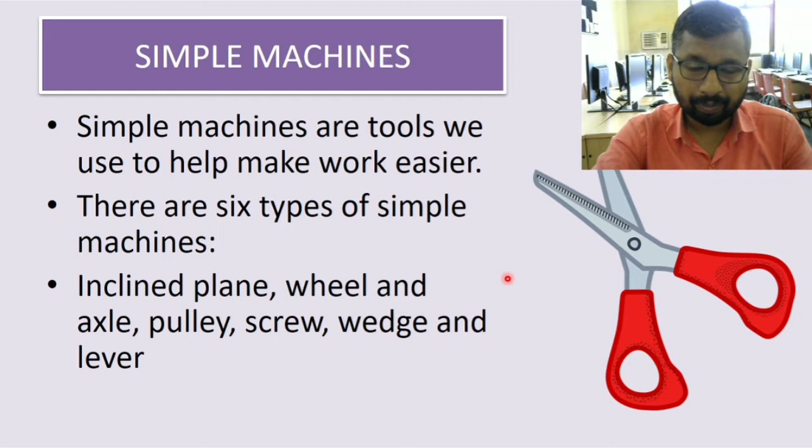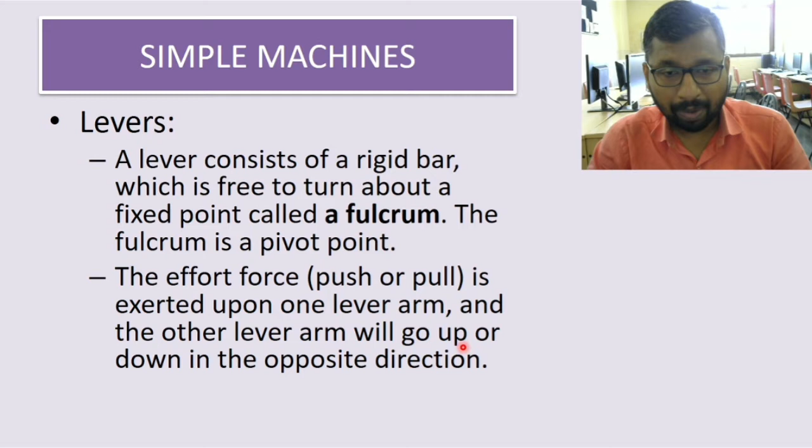A lever consists of a rigid bar which is free to turn about a fixed point called the fulcrum, which is a pivot point. The effort, that is push or pull, is exerted upon one lever arm and the other lever arm will go up or down in the opposite direction. Just like a seesaw - everyone has played in the garden - there is one fixed point in the middle which we call the fulcrum, and on either side kids play with each other, applying force so the opposite arm moves upwards or downwards.

Now the idea of lever is based on three things: first is effort or force, then there is distance, and then there is a balance. The downward force that a man applies to one end is called the effort. The lever's balancing point is called the fulcrum - this is the part of the machine that does not move.

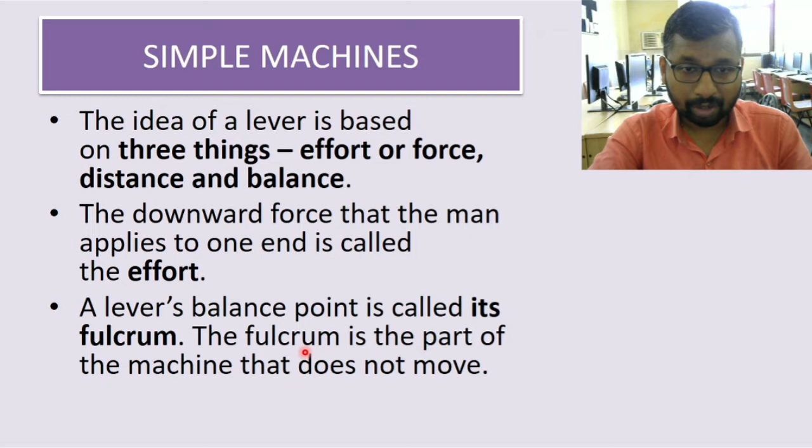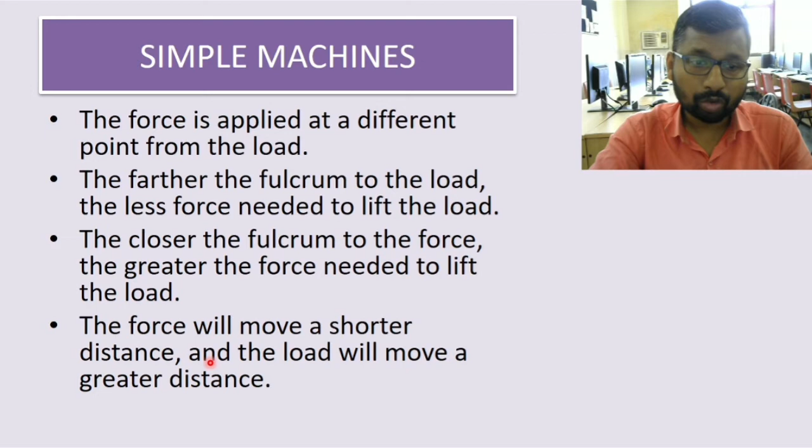Just like I gave the example of a scissor or a seesaw, in the middle there is this fulcrum which does not move, it is fixed. The force is applied at different points from the load. The farther the fulcrum is from the load, less force is needed to lift it. The closer the fulcrum is to the force, greater the force needed to lift the load. The force will move a shorter distance and the load will move a greater distance.

There are three main types of levers. First is a class 1 lever, where the fulcrum is in the middle, with load and effort on either side. So here we apply the effort and here there is a load. This scissor is an example of a class 1 lever, and a seesaw is another example.

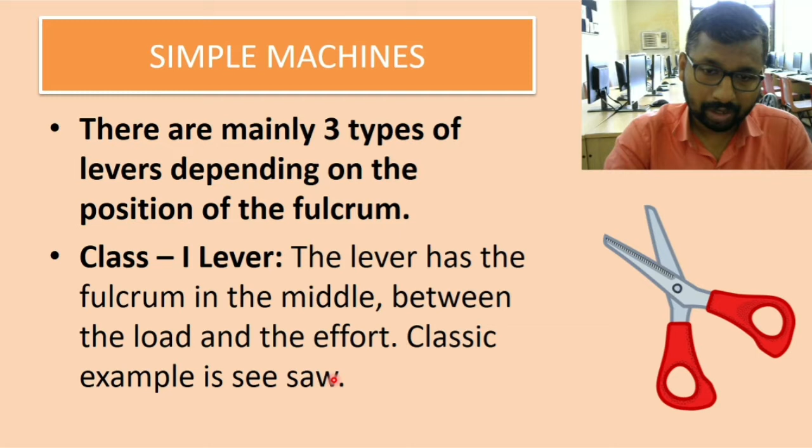In a class 2 lever, the load is in the middle, and the fulcrum is usually closer to the load. So where is the fulcrum? This is the fixed point, as you can see over here. So this is the fulcrum and this is the load, and this one is a pivot point. So here there is a force - wait, this is not a fulcrum, by mistake I called it that.

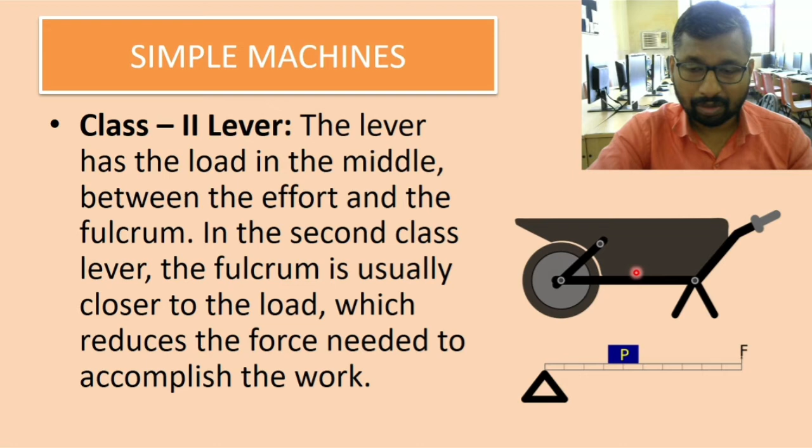This is a force, because here you will apply your effort. So here there is an effort, in between there is a load, and here there is a pivot point, or fulcrum. So here there is a fulcrum, here there is a load, and here there is a force. In this case the load is in between, and the fulcrum and effort are on either end. This is a class 2 lever.

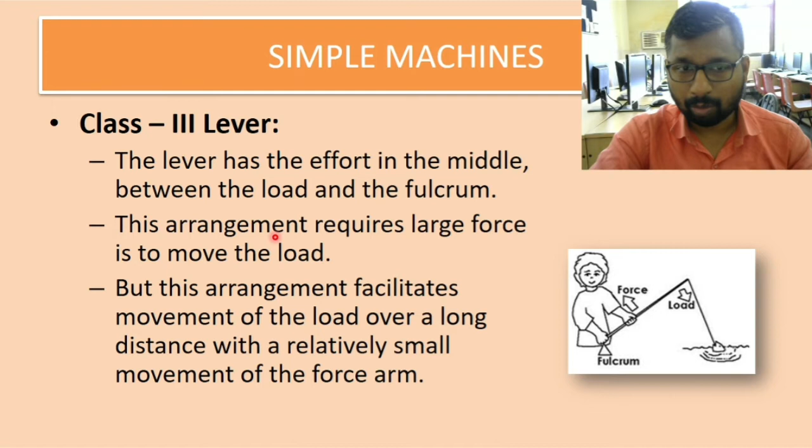Then comes a class 3 lever, where the fulcrum is on one side, force is in between, and load is at the other end - so force is in between fulcrum and load. A class 3 lever has the effort in the middle and load and fulcrum on either end.

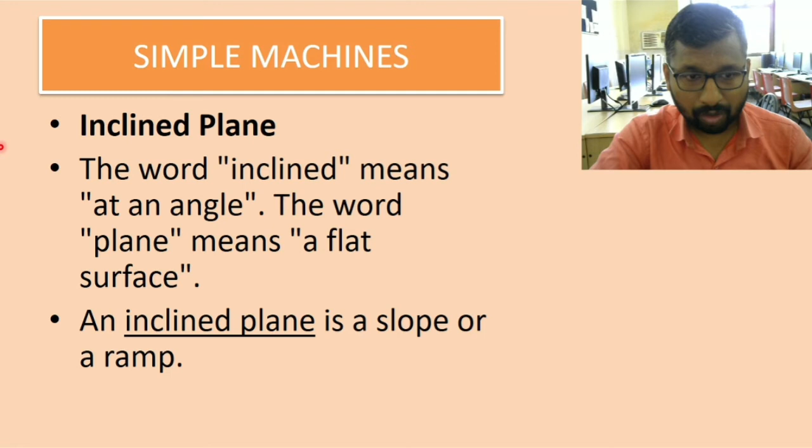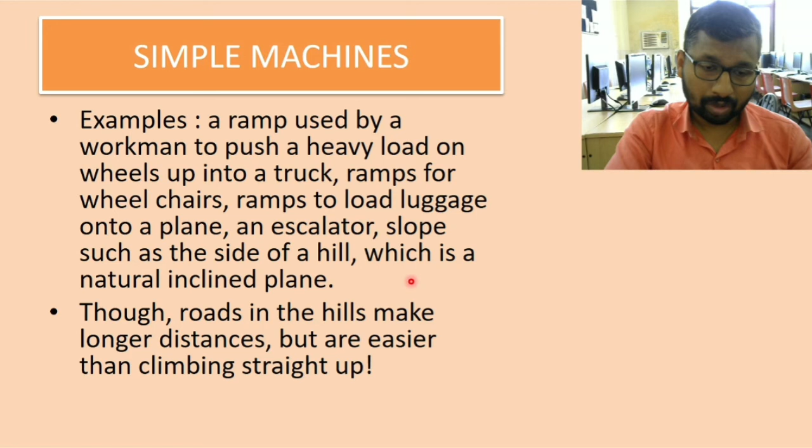Now comes the inclined plane. What is an inclined plane? Whenever the surface is at a certain angle, it is called an inclined plane. So a slope or a ramp can be called an inclined plane. A ramp used by a workman to push a heavy load on wheels up into a truck, ramps for wheelchairs, ramps to load luggage, escalators - all these are examples of the inclined plane. Roads in the hills, though a longer distance, are easy for climbing - that is also an inclined plane.

This is one picture of an inclined plane, where this worker is moving a load onto the truck, making use of this inclined plane. That's how an inclined plane works.

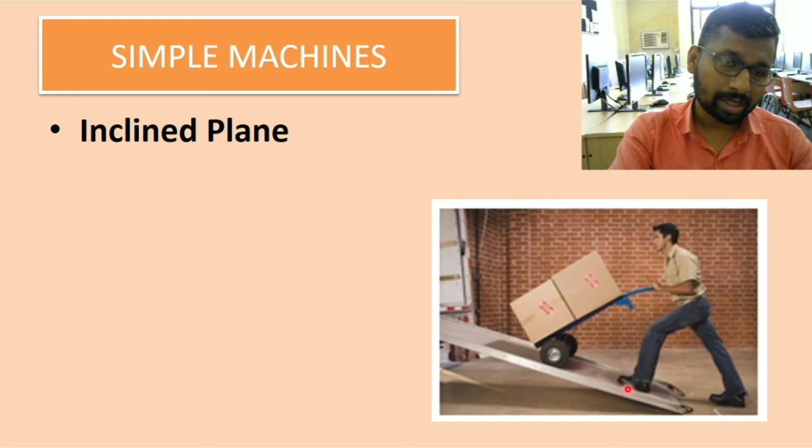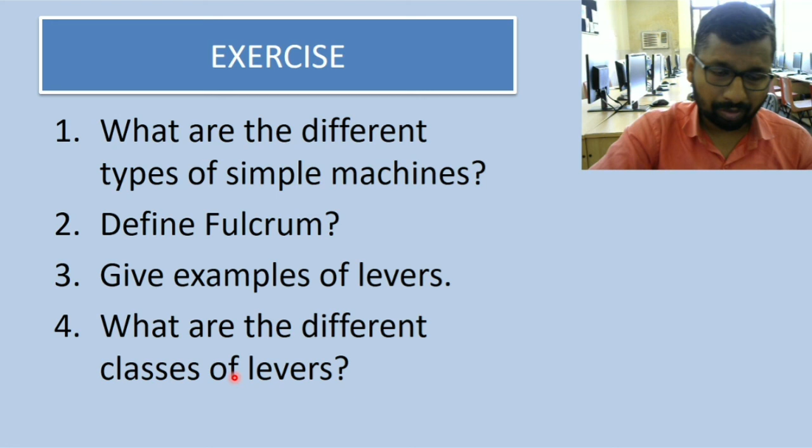Now comes the exercise, which you can try out at home. What are the different types of simple machines? There are 6 different kinds, so you can write them. Then you have to define fulcrum, give examples of levers, and write about the different classes of lever - class 1, class 2, and class 3.